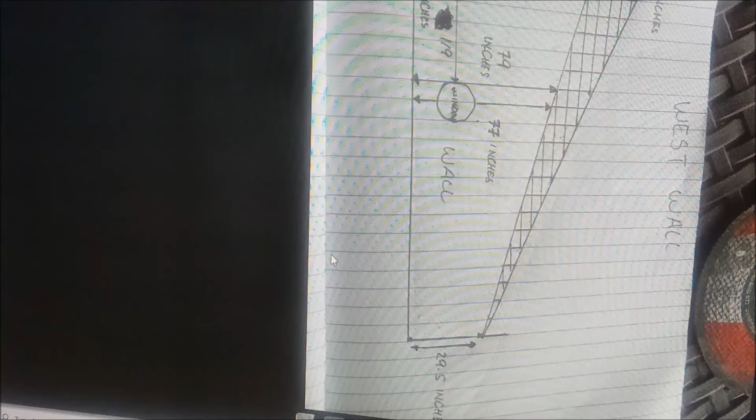This is what the feedback looks like from the guys when you ask them for dimensions.

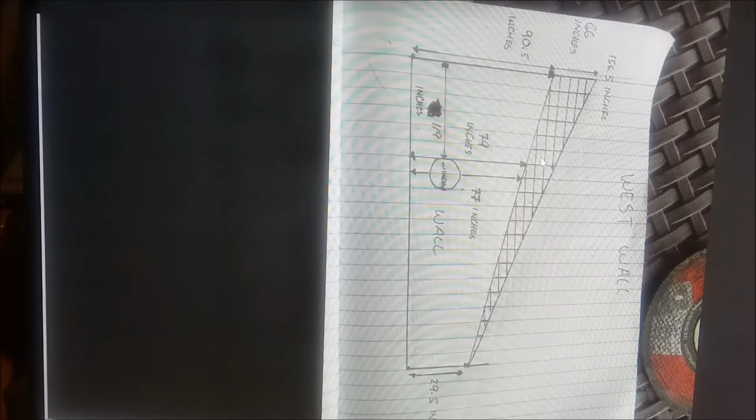We're trying to figure out where this window opening is because we're putting 3 beams across to tie through this wall right through it. And this is a wall that got 156 and a half was what it is now, but when we gave them a number before, it was like this height here. And since we didn't know that this 10 feet existed in the floor, they tied it to the height that was supposed to be and ended up with that slope rather than the slope of the solar panels, which is the latitude. So they sent us some dimensions of what things actually are as built, and we're going to alter the drawings to match.

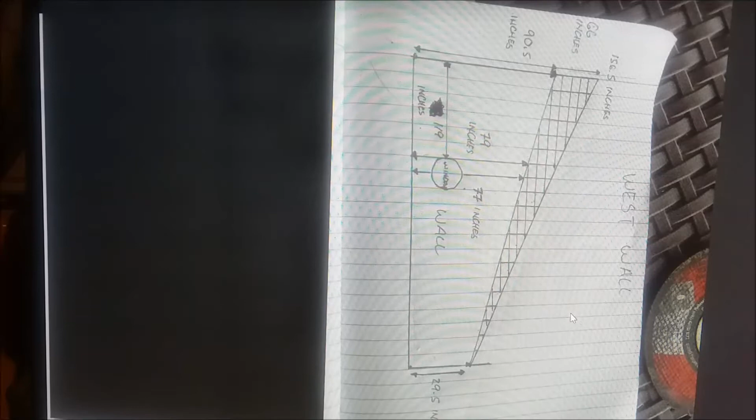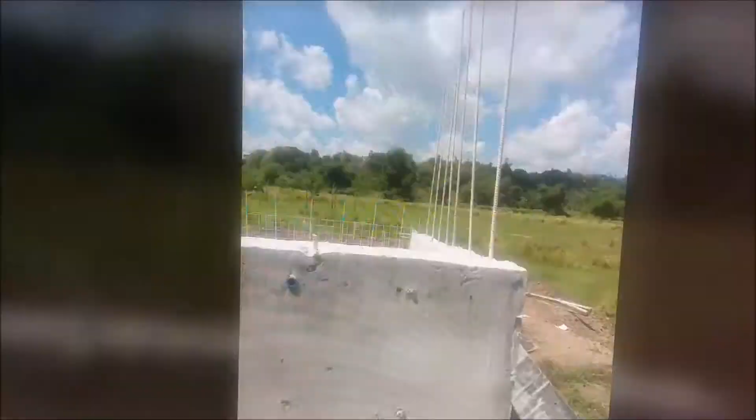This is how much bar is sticking up on the northwest corner. This is the one that's still at the wrong slope.

Just standing back, looking at how much rebar we use.

This is a couple of sets of staging, maybe only 2. I think only 2.

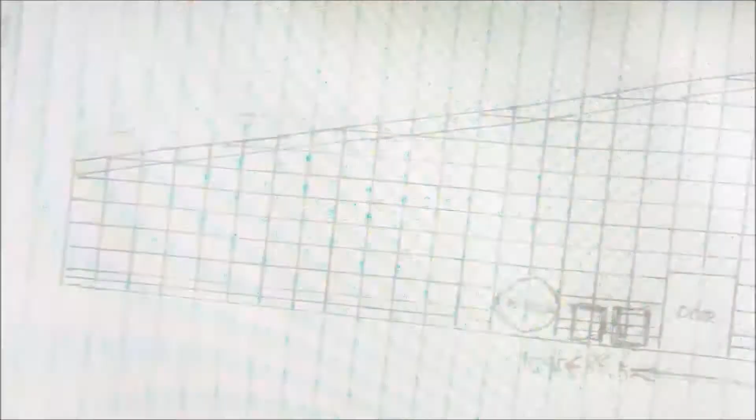You got your basic piece of phenolic board the size of the opening you want. We're not going to show, look at it.

Not to scale. That's the window and the doors. And the wall is drawn about 3 times as big as it is.

Okay, here's these boxes, and they're set in for 2 of the beams. There's another small one goes right in here. These are like a 14 by 18 inch beam.

That's the outer concrete. That's not the rebars. That's the size of the beam. And those are going to fit through this wall and have sort of a nail head of concrete on the outside, earthquake protection.

This one you have to have for the next lift. 4 1/4 inches of it is in the next lift. The rest of it will be up into the next set of forms.

We don't have the box over here, so they're going to have to put the diamond wheel on the angle grinder and just cut across the top strips like 3/4 of an inch apart, and then bust them out with a hammer. For being as hard as this black rock is, I'm amazed they can cut it at all, but it cuts fairly well with a diamond wheel. I could make 10 cuts across there in maybe 20 minutes, and they'll have to make about 5 passes to get as deep as they need to go.

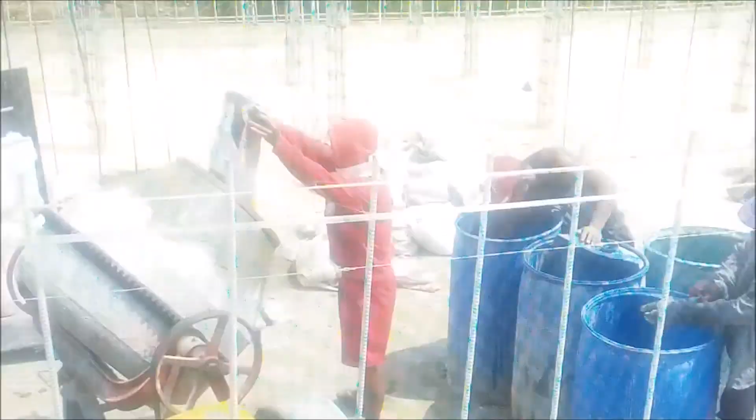Okay, I don't... that's just a quick catch up on some pictures here. I don't know what the... Oh, he's got a bunch of pictures I haven't posted.

Their rebar always looks so organized, doesn't it? You sort of have an idea of what's coming just by looking at the rebar.

This is a one-bag mixer. We did a video, I don't know, a year ago or so, on everything that's had problems with on the mixer. Everything is broke or quit or wasn't done right when it was first built.

And 84 bags is the first breakdown on these mixers. There's a little pipe spacer here on this long bolt that goes through the drum. That sets the bearing clearance on this ring gear to the pinion on the other side. They set it really loose so they guarantee it'll turn when they put it together. Unfortunately, the teeth are barely touching, and it runs making a lot of noise.

At 84 bags, they tilted it over to dump it out, and it went 'nyah,' and it wouldn't turn the drum. They found if they turned it completely upside down, they could roll it by hand.

Anyway, the fix is you measure between the tip of the gear teeth and the bottom of the ring gear thing, and then give it about 2 millimeters of clearance. So it ended up, we took off 6 millimeters off the spacer on this mixer. And that's after we checked it, we made sure the bearings were tight.

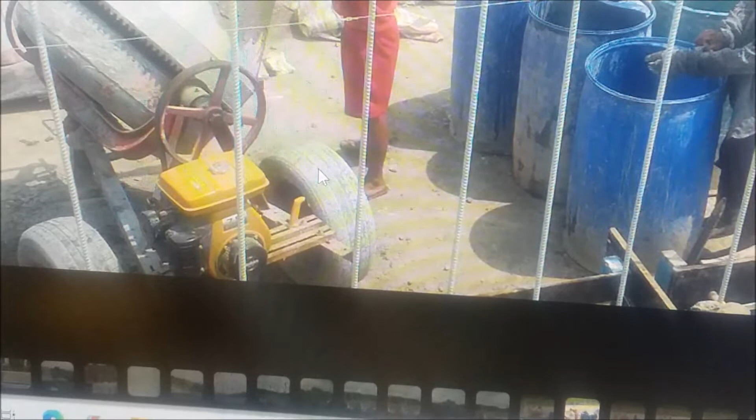We have probably the only mixer in the Philippines the tires don't leak on. When you buy these things, the tires are used tires on used rims. Ours, on this particular mixer, have the same tread on both sides - you're not guaranteed you'll get that. You'll get two tires, and you can about guarantee they're both going to leak. Apparently these ones never came off the rims, and they weren't leaking to start with. Anyway, they were pumped up hard when they brought it down the road, and nobody let half the air out of them, and nobody told us to do it.

So there's no suspension, and this thing beating and banging when it turns broke the bearings out of the hubs - it just crumbled them up. We're going along one day, and a wheel fell sideways. So we set some stacked up lumber under the axle, and we ran it that way for about a week. But then we had to move it to a different part of the property, so I had to go back and put a wheel on it.

So we put new bearings in it, and a couple of days later we were putting the next set of new bearings in it. And I looked at it and I said, you know, this thing's got leaf springs, I wonder why they don't move. It's because all the leaves were welded on both ends - there wasn't any shackle. It couldn't change length, so the leaf spring couldn't bend.

So I got under with an angle grinder for about 4 hours laying out in the sun. I cut all that welding off and took the springs apart and made the shackle functional and put it back up under there.

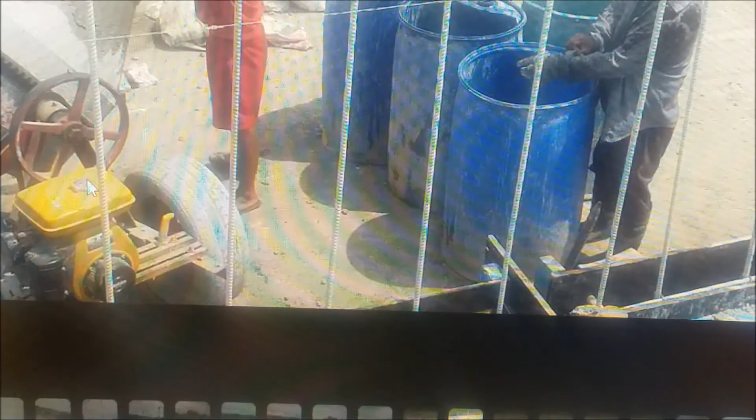If we hadn't had the other mixer trapped on the roof, we would have used it. The spare was for the spare, but we couldn't get it down other than carrying the materials up, mixing them, and carrying them back down. Anyway, we've got a couple spares of those sheaves, and drilled them at 90 degrees for 2 5/16 square-headed set screws instead of the little hex thing that was in it.

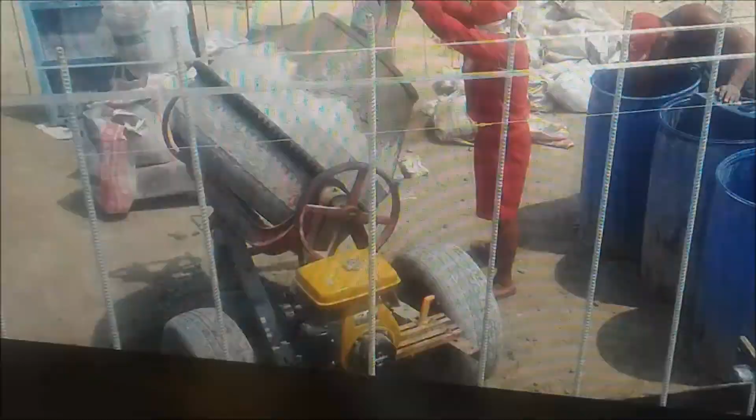And just to show we have a whole mixer, even though it's not in the picture. What other things are going on? I think we posted all these pictures here. Well, maybe not that one.